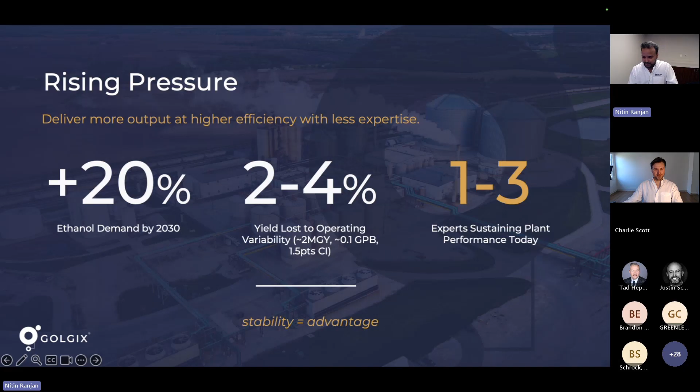Every plant we walk into, we see a common pattern pretty much everywhere we go. The data shows us that there's a small disturbance, whether a meter is malfunctioning or a transmitter is not communicating correctly, or a technique is not followed through SOP, or inconsistency in the techniques, CIP running 10 degrees cooler, things like that. And the problem with these small disturbances is that they don't announce themselves, they propagate. By the time you see the impact, it's downstream. It's in your ferm yield, in your steam economy, in your CI score. And the root cause is almost 2 or 3 days behind and 3 unit ops behind you.

And that's the problem we built Golgix to solve. We wanted to build an AI system which can look at the whole plant together, not to replace your operator, but to give them the connections they can't see from a single screen.

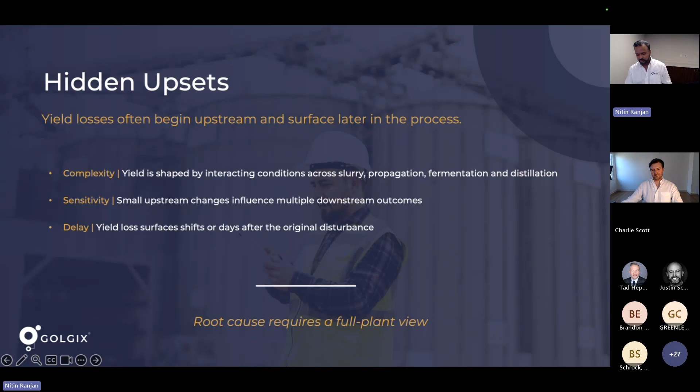So with that, I will introduce our company and our solution to you, and then we will get into the case study. So Golgix is a human-centric AI production intelligence company. What we do is we empower operators with clarity, foresight, and guidance so they can make faster, better decisions on the plant floor. And that will help improve your yield and cut down variability.

What we do, as I explained, is production intelligence, but the way we do it is we have built an AI software and an agentic orchestration, which provides early warnings and deep dives, capturing your historian data and all the context which your people, your experts have, the tribal knowledge. We bring that both together into a single solution to provide you with early warnings, as I said, an hour, 2 hours before something is going to really bleed you out in the downstream recovery process.

All of that can be mined and made visible. And our AI software and the agentic orchestration is doing that using the plant data you already have. And how we do it: most of the data we analyze, whether it's on the HPLC side or on the DCS historian side, shows us a very clean distribution. And the 95th percentile operation, which happens 5% of the time, versus a mean somewhere around the 70th or the 50th percentile. The means are basically because of the hidden upsets we are talking about.

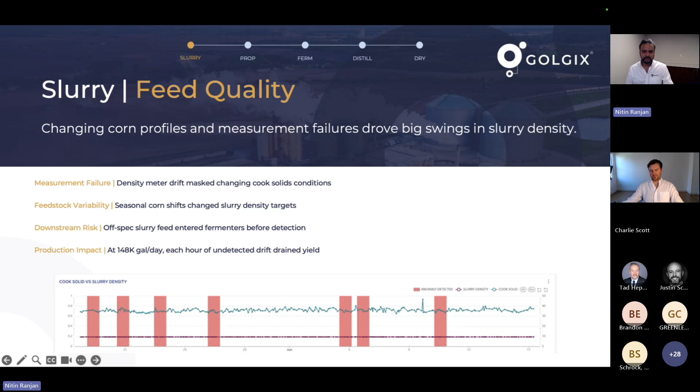So what did we do for this problem? We commissioned our early warning system that watched the slurry density and the cooked solids and whether they are tracking together or not. When they stopped tracking, it fired roughly an hour before: bad feed will hit fermentation in 60 minutes if you don't flush your density meter. That early warning goes out as an email or an in-app notification to the operator so they can go flush the density meter, correct it, and move on.

With that intervention alone, the yield was up by 1.08%. That's almost 0.034 gallons per bushel. And at the throughput of this facility, that's almost 605,000 gallons per year. With rough math, that's 1.6 million in annual revenue just from catching a broken meter an hour earlier.

So this case study was all about: you watch the relationship, not just the empirical value, which the DCS puts up in the control room. And when you watch that relationship, and if that relationship gets broken, using our early warning system, we were able to catch feed quality failures, as we call it, 45 to 60 minutes earlier. That was giving consistent results to the fermenters in the feed, in the mash consistency, and producing higher gallons per bushel.

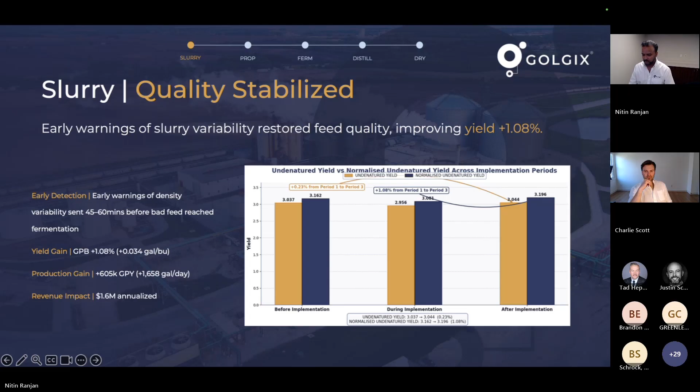Going from slurry to prop here. And I have to admit that this one is uncomfortable, and I say that with respect, because this is about an operator. So at this facility, we noticed cell count trending down plant-wide. Leadership of this plant couldn't tell if it was biological, equipment, or people.

So when we dug in, we processed around 160 batches in this process, close to 5,000 measurements. This is what jumped out, right? Batches with identical ethanol yield at around ferm hour 25, 7.9%, but the cell count varied 3.6 times. That's biologically impossible. And 23.5% of those batches showed cell count decreasing during the active growth phase. And we all know yeast doesn't do that, people do that.

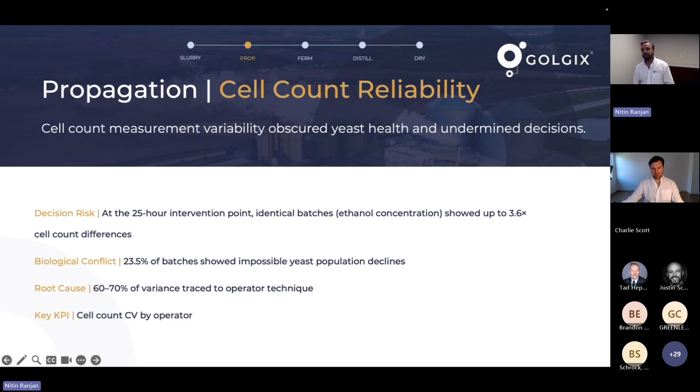60 to 70% of the measurement variance was operator technique, not equipment, not biology. And one operator was significantly above peers on variability across every stage, but nobody could prove it. It was just a gut feeling, but now it was data. So here's the results for that, right? And this fix cost $0 in equipment.

When we dug in with our deep dive on this particular case study, we found different ways operators were pulling wrong samples, and each one traceable to a specific cause. For example, one operator had an actual vision issue affecting the microscope, and another one was new, really green at the job, and still dialing in dilution technique.

So instead of chasing ghosts, now a live dashboard at this facility tracks measurement consistency by operator. And the lab managers who were getting bombarded with false alarms finally got quiet screens, and the ones who needed coaching got the right coaching. So this is, again, the same kind of trend as you saw from the slurry to the prop: every variability can be explained if caught early.

And instead of chasing ghosts, where we took a bad sample and we are trying to solve for something downstream that doesn't even exist, it's just a measurement error. So finding these types of issues by looking at the process holistically is the advantage we were talking about earlier.

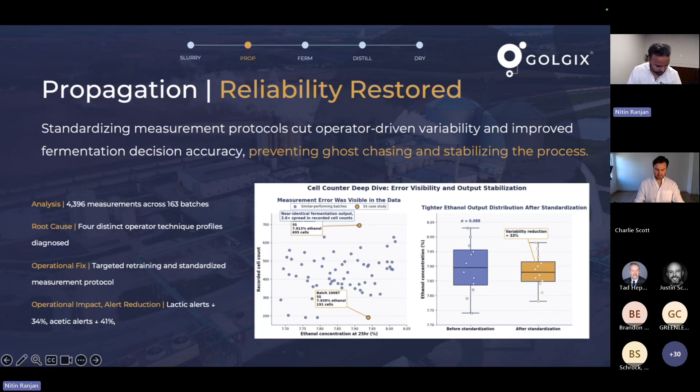All right, this is my favorite, and this is the big one, right? Fermentation, the heart of the ethanol facility. This facility averages around 13.53 ethanol concentration, but their swing in the output is plus or minus almost 15,000 gallons per week. And when we approached this facility and started working with them, the plant leadership was super smart, right? They knew that something as simple as before and after to explain this output variability

with fundamentally different conditions. And when I say fundamentally different conditions, what I mean is we have to take care of sentinel variables like outside air temperature, the ambient conditions, the inputs, cornstarch content, the flow rates, which change season to season or day to day. All of those need to be considered before you can really isolate the reason behind the swing in the output gallons, right?

So when we commissioned this site, we engineered our deep dive agents to go across 6 months of data to confirm this pattern. And here's what they found: bad drop batch rate running around 20 to 30% plant-wide. So that's how many bad batches they were dropping. And a single fermenter hit a 57% bad rate in a single month, with contamination signatures clustering in specific weeks.

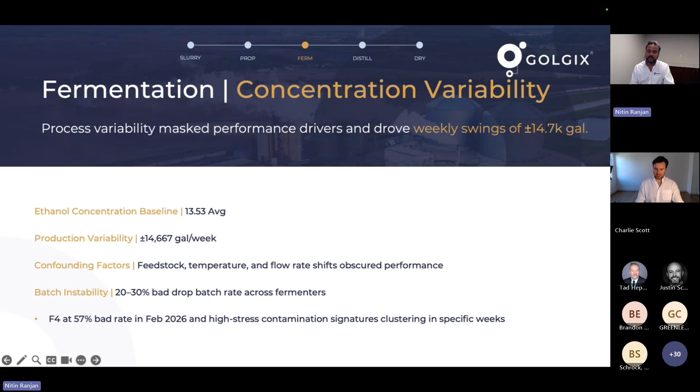So what did we do, right? We basically normalized all of these sentinel variables like the ambient conditions, the starch content, the slurry, the flow rate, things like that, and stripped out these conditions to isolate actual operational improvement versus what a good week of weather looks like. And the root cause we found was very simple.

One was the CIP running too cool, letting bacteria outcompete the yeast, and also some dosing imbalance, which was causing yeast to tail off from the hour 30 or 40 mark. And the funny thing is, the operators always knew that there was something like this going on, but they just weren't able to prove it.

So using this deep dive kinetics analysis, we were able to prove that if they moved their CIP from 180 to 190 Fahrenheit, just with that change, they were able to drop their overall contamination across all fermenters, not just that one fermenter. I think it was fermenter 4 or something. Yeah, not just that one, almost 9%.

And after that, when we tracked each of the metabolites, including glucose and ethanol across the 11 points per batch, we saw exactly where the batches were falling off. And just the CIP change was able to eradicate the acids which we were seeing in the fermentation process. Further, on the tailing part of it, they tried to run different dosing of protease, right? They switched from 6 to 5.

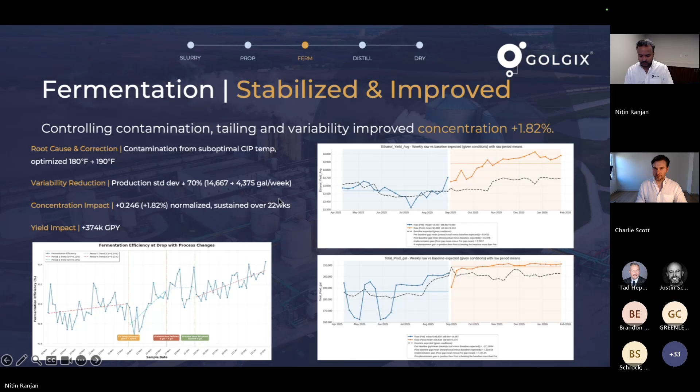Distillation and the recovery and efficiency. If I would take a poll, everybody in this room would want to run at the most efficient point at any equipment stage, at any unit op stage. In distillation, I have seen plants run at 99.5% recovery, and that's what everybody wants to be at, right? But

once we dove into it, the data told a different story than running at the highest possible capability of the plant. The relationship between the steam and recovery is never a straight line. How do I put it? It is a diminishing return curve when you consider unit economics, the cost of natural gas versus the cost of every gallon of ethanol you made from that.

So we call it a knee point. There's a knee point at every facility. And at this one, it was around 13.2 steams per gallon, where you're getting the most recovery per BTU. Past that, you're burning gas for almost nothing back. And so without visibility into that curve, operators default to more steam, better recovery.

And especially given our current market condition, everybody is pushing more ethanol, a high throughput period, where the instinct is to compensate. And steam economy ranges from around 11.85 to almost 12.25 with high variability. And operators don't know where the knee sat on any given day because it shifts with changes in the feed composition, upstream ferm quality, how much ethanol concentration is coming in the beer feed and things like that.

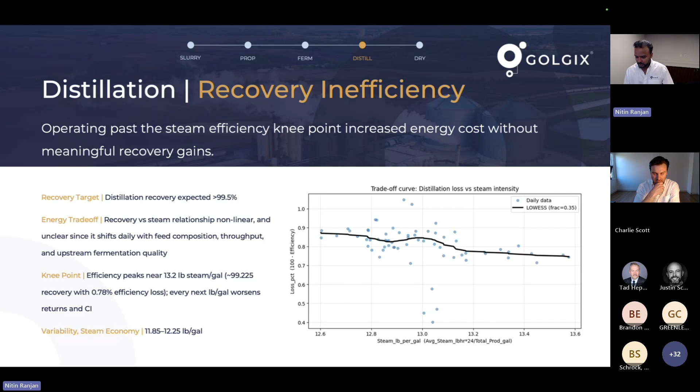So for that, we built a trade-off model to build that curve at this facility, recovery efficiency against steam intensity across the full operating range. As I said earlier, the current optimal point sits at 13.2 steams per gallon. Past that, every additional pound of steam costs more in natural gas than the ethanol it recovers.

Further, we all know that plants go through ups and downs, and you are trying to push more ethanol. When we tried to commission the early warning with a very tight curve, we saw early warning fatigue, so to say. So instead of pushing for the 95th or almost 100th percentile of accuracy of where you should have your steam pounds per gallon, we relaxed that curve to 75% so that the alert frequency doesn't become crying wolf, for lack of a better word.

So we relaxed that alert frequency by reducing from the golden point to a silver point, and it was able to help operators actually have a controllable amount of early warning, see what distillation efficiency they should run at, which will give them better unit economics and net result from that.

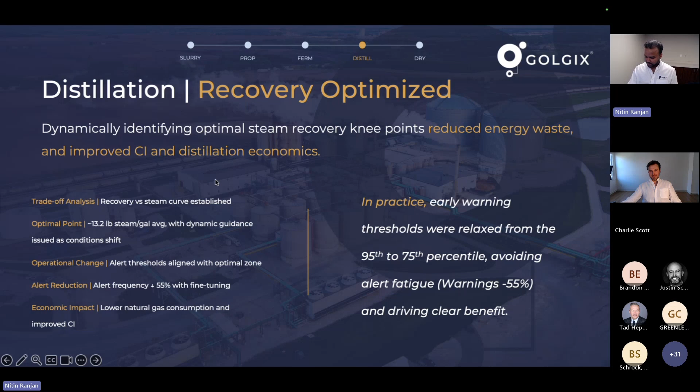Right. Please, if anybody else has any questions, let us know. With that, I will move to the last part, the last case study here that ties it all together for us. And it's a hot topic as well in the industry around CI, and truly understanding upstream instability driving downstream energy waste. Right.

Whenever we talk about CI score on the plant operation side, we associate everything to dryer energy because that is where the most natural gas is being used, right? So dryer energy is one of your biggest controllable cost and CI levers. But I would say most plants treat it as a back-end problem, and actually it's not. It's actually a holistic problem. It starts all the way at milling and cook and fermentation and propagates downward, as I have shown in the case studies. So for this facility, the pattern was very clear, right?

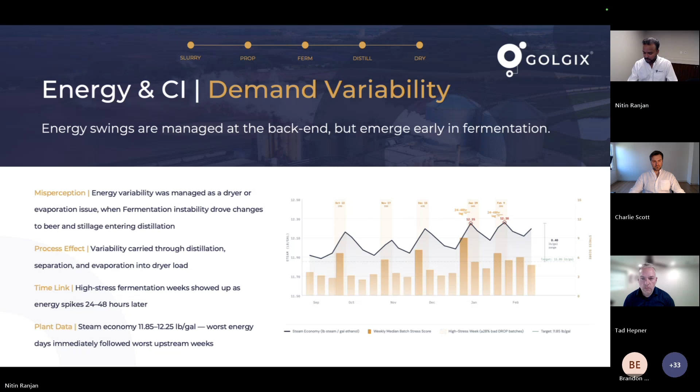So, that's what we wanted to present to the audience today: to understand through these case studies, going all the way from cook to dryer, how it manifests on the dryer side, on the energy intensity or energy efficiency side. And we have quantified in this entire 5 case study approach that we saw contamination reduction by 9%.

We saw variability in your output gallons reduced by 70%, where the swings are not happening anymore by reducing that contamination. And this case shows how the same engine extends into the back end, connecting batch quality to metrics plant leadership actually cares about, which is steam cost, natural gas intensity, and CI score. So if we can solve the variability upstream, you have a direct effect downstream as well.

So now we are further working in this use case. We are going through almost 3 years of data here to explain what fermentation performance or fermentation quality explains the thermal variability we are seeing on the dryer side versus what is just inbuilt downstream inefficiency. Having that clarity will further help that producer control this 0.4 pounds per gallon swing which we are seeing on the steam side for them.

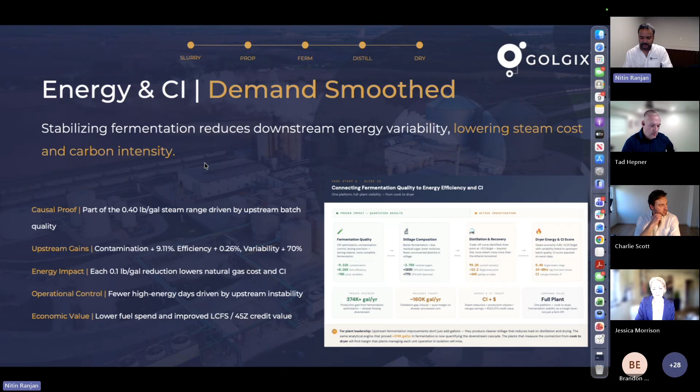Charlie and I have spent a lot of time together working in oil and gas before even Golgix, right? And we learned with that experience that when it comes to industries like biofuels and oil and gas, data is very sensitive. It's almost a competitive advantage for producers, right? So we architected this solution in a way that it can live behind our producer's firewall. When we deploy our technology, though we are agnostic to any architecture, we purposely put one architecture on top of everything, where we deploy on-prem, meaning behind their firewall. So their data lives behind their firewall.

The data never leaves their firewall trying to hit our API or any cloud service to get processed and provide this intelligence. That way, no IT team hates us, because they don't have to change any cybersecurity rules or policies or firewall rules as a part of that. And they can use our solution behind their closed firewalls and make decisions. So any learnings which come out of that also stay behind their firewall. Anything they document, anything they write down, any SOP they upload, everything stays behind their firewall, no data leak happening to the outside world.

Awesome. Thank you. Thank you for that. I think just following up on that ahead.

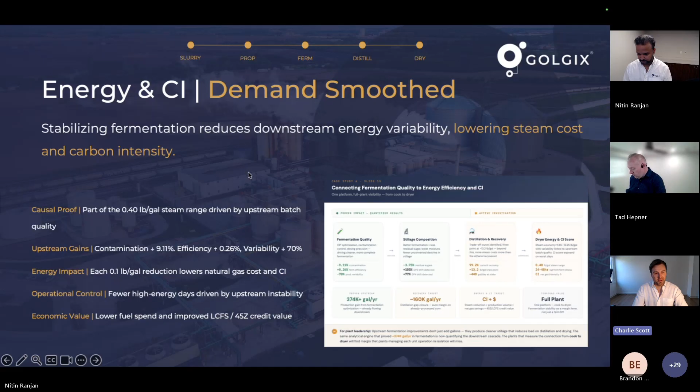Really quickly, Tad, something for the audience, for people looking to start exploring AI, or maybe you already are: something that you should look out for in the agreements that you're signing with potential partners, or on a pilot or a full-fledged deployment, is who owns the data. And in our case, our clients own their data. And just a really high-level example.

I actually need to research this, but the simplest thing is, if we're talking about social media or something, you make a post, you don't own that, right? And what I need to check is in ChatGPT, right? If you enter a question, you don't own that question anymore.

When you enter data, or you transfer data into our solution and it processes it and gives you back intelligence, you still own that data. So I think that's been a very important piece of this puzzle, and something that people should consider when they're making decisions with an AI partner.

Right. So we're almost to the end. I got a few more just for my own curiosity. So, I'm an ethanol producer. What's it look like? Walk me through initial brainstorming and conceptual, integration, and then what does the relationship look like going forward? Kind of walk me through that piece.

Sure. So how we start an engagement with a typical ethanol producer is we will first provide a user demo, like how do you use our technology with your current means, so that you can touch and feel how the technology looks and understand the capabilities. But the engagement starts with us looking at your data first.

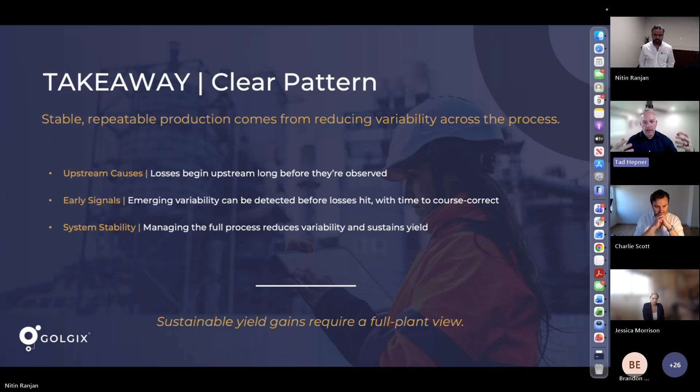Right. Thanks. All right. So just with a couple minutes left, we'll kind of do key takeaways. I'd like to hear from you guys on what you see in the industry and how it works going forward, as well as give us an overview of the Golgix opportunity, and what's up next for you guys?

Sure, Tad. So, I just wanted to pull this slide together as, throughout this webinar, we wanted to stress one point, right? That across all of this, it's all about variability, right? It's all about variability which gets introduced because of feedstock changes, because of upsets, because of changes in the outside air conditions, which you cannot control, right?

And usually these upsets start anywhere in the plant, but because a lot of the tools out there look at unit operations, right? They look at slurry, they look at cook, they look at distillation in isolation, they miss the trend. They miss the common pattern, where it starts, where it falls, right? And they spend a lot of time trying to discover where this actually began. And that is the killer in all of this, right? So why is that the case?

Because often the root cause is hidden, not because your folks aren't good, but because no human can connect a slurry meter drift which happened at 6 a.m. to a steam spike, right? Which is happening 72 hours later in a dryer in a single shift. So they were not even there, right? So this is not a people problem. That's a visibility and a decision intelligence problem, which we are trying to solve.

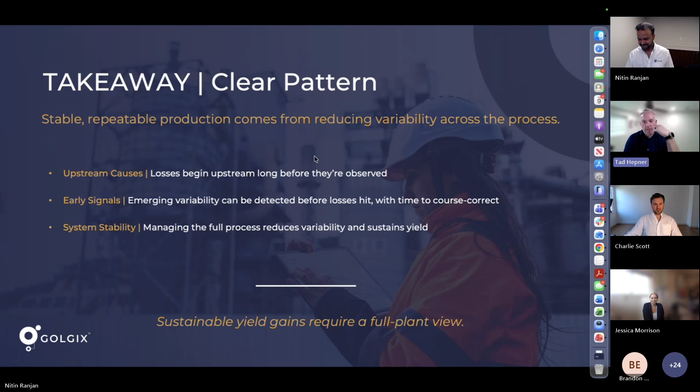That's awesome. I guess I'll leave everybody with this, in honor of the Masters, which started today. This group has heard me talk about a kind versus difficult learning environment. And one of the examples I like to use is, golf is really tough. We all know that, but it's a kind learning environment. And you say, well, what do you mean? Well, after you swing that club, your feedback is immediate. You may not know exactly what happened, but something happened and it wasn't intended.

Ethanol plants, we joke a lot and we say, hey, we're just making booze, but it's not a kind learning environment. There's things that happen long before you see the fruit of that mistake or that opportunity or that right decision. And so I think that the technology and the opportunities that you guys can uncover, like you said, they're hidden, is a super interesting opportunity for ethanol producers to take advantage of.